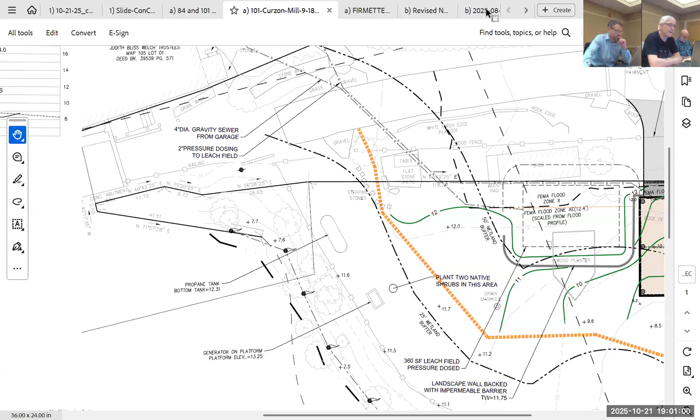All right, let's bring this meeting to order. This is the October 21st, 2025 Newburyport Conservation Commission meeting taking place in the Senior Community Center boardroom as well as online on the Zoom platform. This meeting's being recorded. The first item are certificates of compliance, etc., which we do not have any tonight. So we'll move on to public hearings. And let's open up the public hearing for Judith Welch, 84 and 101 Curzon Mill Road. Notice of intent. Good evening, Tom Hughes with Hughes Environmental Consulting.

As the commission, I think, is aware, we amended the filing to also include 84 Curzon Mill, ran a new ad in the paper, and we've notified abutters. The abutters list now includes, I think, 2 or 3 properties that are over the line in West Newbury, so we had to notify folks in West Newbury as well. But regardless, basically the reason is when we had our last full hearing on this matter, we had fielded the question about where you're connecting into utilities, which is a pretty damn good question.

And so when we went to answer that, it turns out that the existing septic for the mill where the Welches live is less than ideal, right? I mean, I think it would have been legal to connect to it, but it wasn't our recommendation. So rather than having a septic that is right up near the river, that is a very old technology, we opted to eliminate that, put the septic over on the 101 lot where it can be further from the resource areas. A modern design, improved water quality.

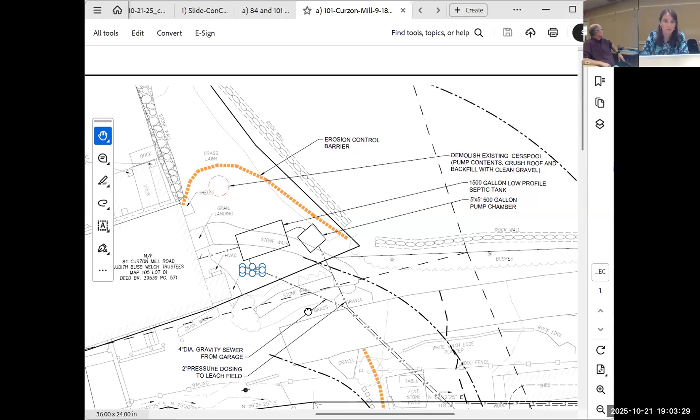No, sorry, Kelsey. Okay, so right there, what you can see is we're going to demolish the existing cesspool, pump the contents, crush the roof, backfill with clean gravel, and you can see where that's located. And you can see, don't have a scale bar up, but you can see how close that is to the building and to the dock. Not a great location to have a cesspool. It isn't failing, but it's just not what we really want to hook a new bathroom into.

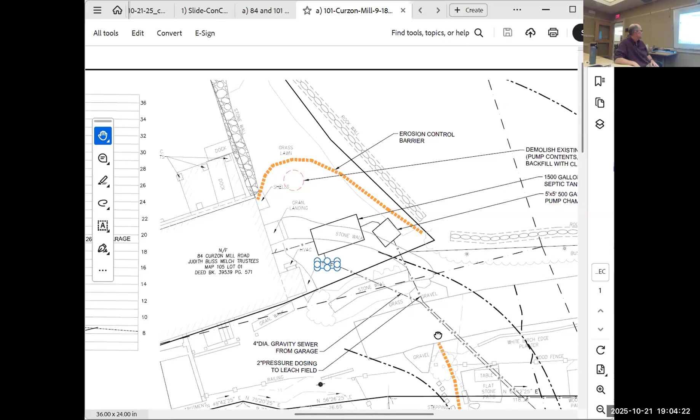So that'll be abandoned. We will be putting a septic tank and a pump chamber on the 84 property. And that will then connect over to the garage and where the septic system will be. So if we can scroll down to the garage end, so it's sort of bottom. Okay, a little bit to the right now. Yeah, okay, so we've got the proposed garage.

You may recall we're in BLSF, so this thing is gonna be pile or pier supported, basically an open structure. This is not Plum Island, so we can have footings, but it's gonna be columns. The plan right now is piles. We've done all the flood calcs to make sure at every incremental elevation foot within BLSF, we are compensating more than the fill amount from the structure. And then you can see where the septic system will be going off to the left.

The flood calcs have all been updated and we still meet all those requirements. The updated table is on that plan, probably in the bottom left.

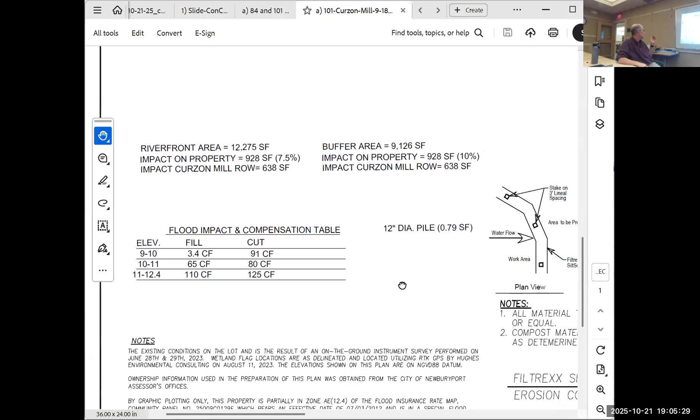So you can see, between elevation 9 and 10, we're cutting 91 cubic feet, we're filling 3.4. It's the nature of the lower elevation: in order to compensate at the higher elevations, we have to dig a bigger area, which means we're creating way more flood storage at the lower, just in order to be able to get the upper, because we have to kind of finagle our way into that area to the cut.

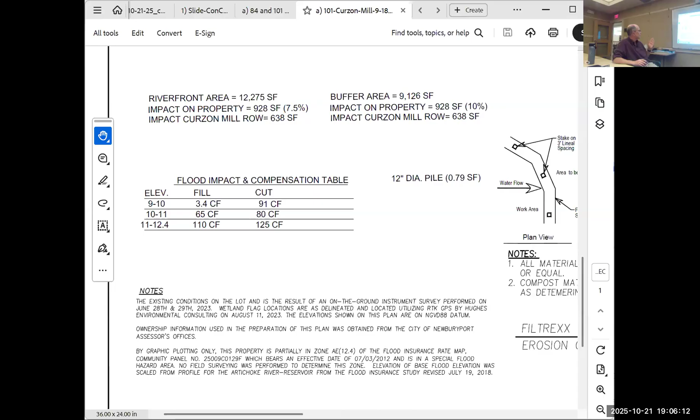10 to 11, with 65 cubic feet of fill, 80 cubic feet of cut, and then 110 cubic feet of fill at the higher elevations, and 125 is being created. The other issue that we had talked about, if we can scroll kind of up and to the right near the water, there's a propane tank and a generator.

So you may recall that there had been an issue that we had not been made aware of, but apparently there was a big storm, there was power failure, nothing was working, including the septic and all that kind of stuff. Everything was kind of failing, and the city allowed them to do some emergency work, but conservation wasn't involved, to put in a generator and a propane tank. So the question was, are those things in the flood?

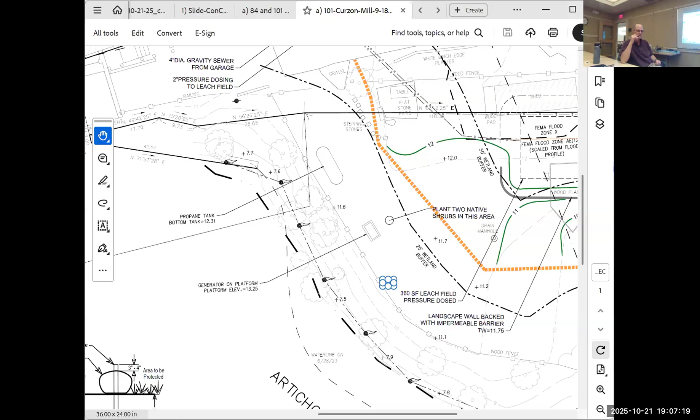The generator is on a platform, and the bottom of the platform is just above the flood at 13.25. The propane tank is on a stand, and the bottom of the tank is 0.2 of a foot into the flood. It's such a small amount that it's not gonna make the tank buoyant in the event of a flood. Depends on how empty it is, maybe. I mean, even if it's totally empty, if it's just 0.2 of a foot, it's not enough, I think. Sorry, this is based on the existing flood maps, meaning trends up until now.

Right, now the thing is, if the commission would like that elevated further, then we would just ask that you do a condition that asks that that be done, and then we can have the propane company do it. I can't imagine it's that difficult. They probably have to shim the stand up just a little bit, and we could get it above flood, but it was really 0.2 of a foot, so it's pretty minimal. So those ended up not being an issue.

All other aspects of the plan stayed the same. We had some plantings, I think, that we had included early on in the whole discussion. All that has not changed. So I think we really have just been waiting for the septic design to be done. That's being filed with the Board of Health.

And part of the problem was the turnover in the health department coincided with the contractor who had been witnessing the test pits for the perk tests for the city no longer being on board as well. So we kind of had to wait for the new health director. The new health person actually, I guess, can witness these things too. So we have taken care of that. Got a good perk and got a design, and Steve Sawyer, the engineer, did the design. Frankly, if I needed to get a septic system, he'd be the guy to call. So I feel pretty good about the project overall.

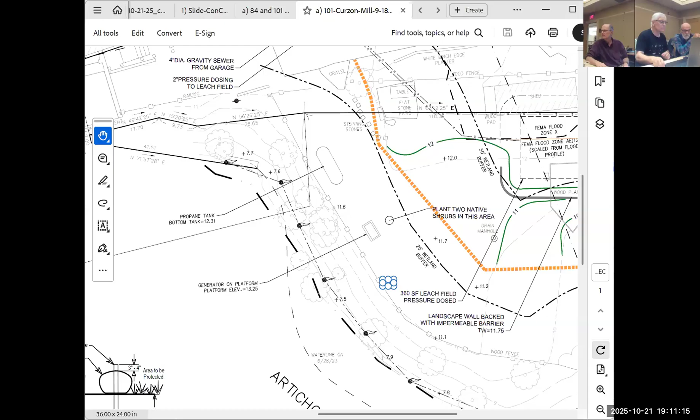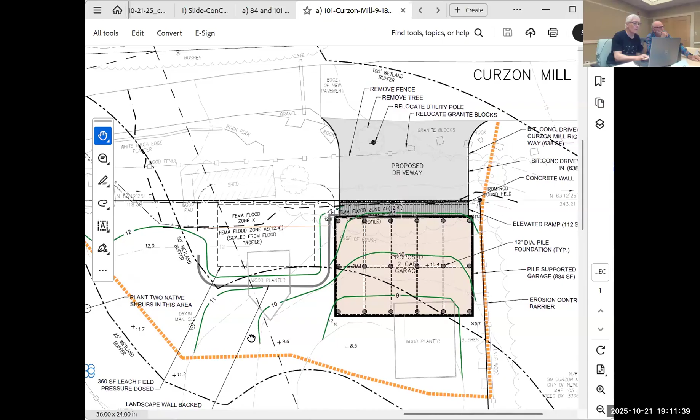I had a question about, there were two pipes that were laid in. Triangle. Here's some. One was labeled coming from the garage. Oh, so in the plan view. Yeah, all right, so let's go over there. The pipes, the labels were up by the house. That's the plan that I looked at. Keep going slowly more to the left. Oh, so you have to have a return for this.

I think this is a Presby system. So you have pressure dosing to the leach field, and gravity sewer from the garage, so you're basically sending the sewage back to the garage to go into the tank by gravity, then into the pump station that then pressure doses the septic. Okay, you're in the garage and you flush the toilet. Right. It's going over towards the house across the street. Why not directly into the leaching field?

Because it has to go into the tank where you settle out your solids, then into the pump chamber that takes the liquids and pressurizes it, so it goes into the pressure dose field of the septic system. So we could do it, but we would need another tank and another pump, and it complicates the design. This way you have one feed for your septic that's going into the field. That just didn't make any sense. I mean, it does now, but when I saw that, I said, what? Circle of life, sort of, yeah.

And the dosing is what? So pressure dosing is essentially a fancy way of saying it uses pressurized piping with like sprinkler heads to dose the field uniformly. Oh, you're just spraying the effluent all over the field. Yeah. And it allows you to have a smaller footprint and a more efficient system. The way it works, you're going to have a 1,500 gallon tank that has, where is the outlet that goes into the pump tank? At what level?

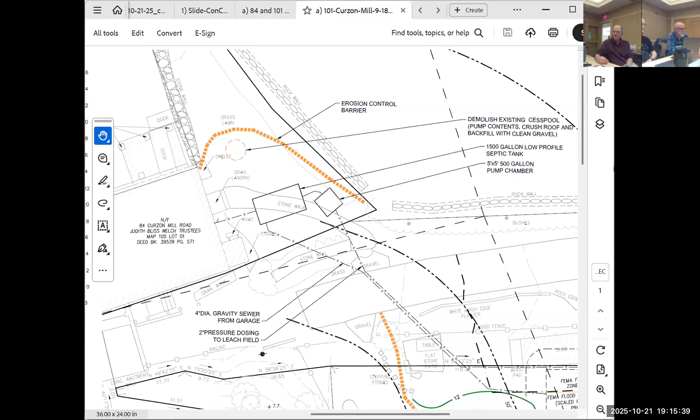And there's a cross-country sewer line that runs into that neighborhood from the pump station on Hale Street. It's not very far, but if you go in the middle of the wetland, there's a little island, and in the middle of the island is a manhole. So there are cross-country sewers, and I just thought there must be one. Well, the state park headquarters doesn't have sewer. They're on septic. And when you had asked about it, the first thing I was thinking, well, they wouldn't show a bathroom if we didn't have sewer.

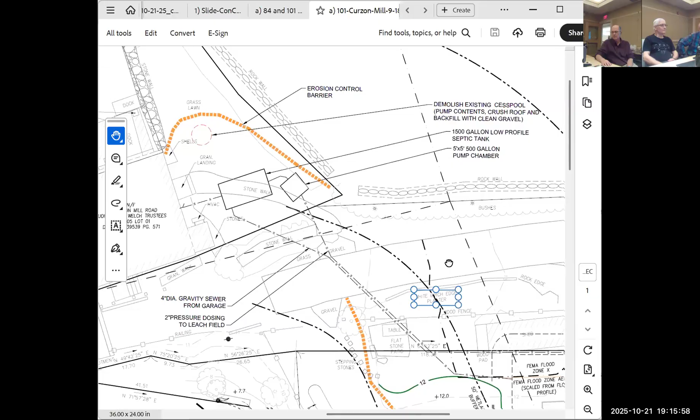Anyway, after that, I went out and looked around and on the house side of the property, I said, there's no room for septic. Yeah, no, it's a cesspool. I mean, this is an old mill building, right? I'm sure at one point, probably not too long ago, probably 67 years ago, they probably had a straight pipe. So that's sort of what I was looking for.

Yeah. No, I mean, at least it wasn't a straight pipe anymore, but still, there's not an awful lot of filtering and attenuation that occurs when you're that close to the water, so I'm thrilled to see this project results in not just a garage for the client that meets their need, but actually a new septic system.

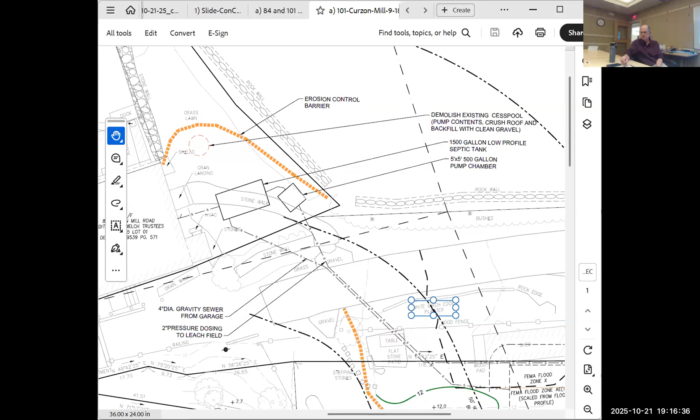And it's in the cover email that I did upload into the system, but basically within the regulations, septic upgrades such as this, where you're taking an old septic and improving it to make it compliant with Title V, is presumed to meet the regulations, all within the Wetlands Protection Act regs. The only thing that's not presumed to meet the interest are the BMPs during construction. So, Julie, I see your hand raised.

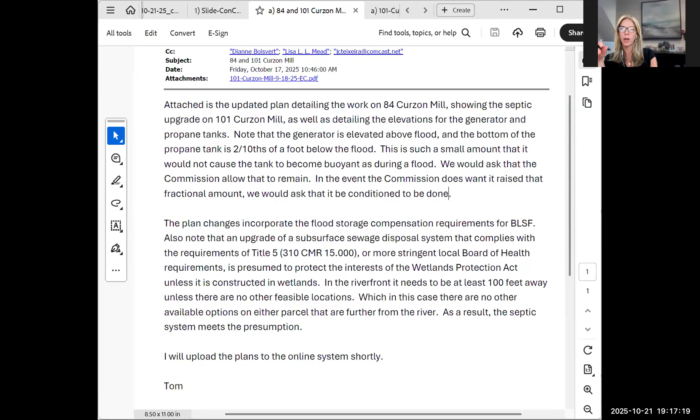Hi, yeah, thanks, Kelsey. So Tom, I just have one question about the cut and fill and the compensatory flood storage. Could you point out specifically the areas where that compensatory flood storage will be taking place, and then how that is being treated, vegetated, stabilized, whatever, during and after construction?

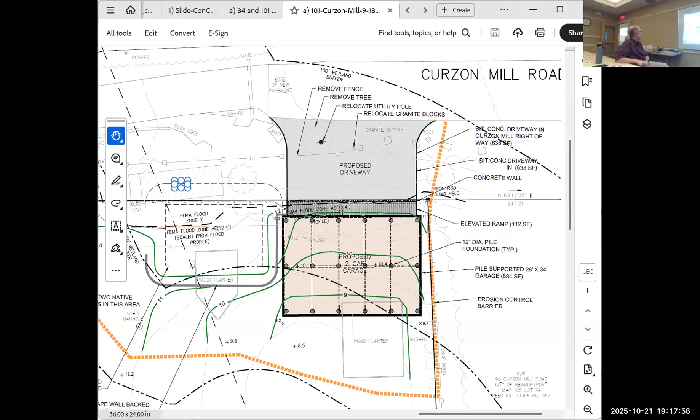Yeah, the bulk of it's under the garage, so there's a little bit of fill with the septic itself. You can see there's kind of a grade line that runs around that. You see elevation 9, 10, and 11, and actually the grading around the septic looks like maybe a combination of fill and cut. But the green lines there are the grading.

What we're doing is we're bringing elevation 9 further in, elevation 10 further in, and then elevation 11 further in, and then elevating the structure up on piles. Underneath, I believe it's gravel or it may even be concrete, but it's going to be under a garage. And then any of the areas that are graded within what's currently lawn would just be restored back to lawn. Got it.

Okay, maybe that could be marked on the plan in terms of where you're going to revegetate. Or maybe it's in the narrative already that any areas disturbed for the compensatory flood storage or through construction will be revegetated. I don't know if it's in there.

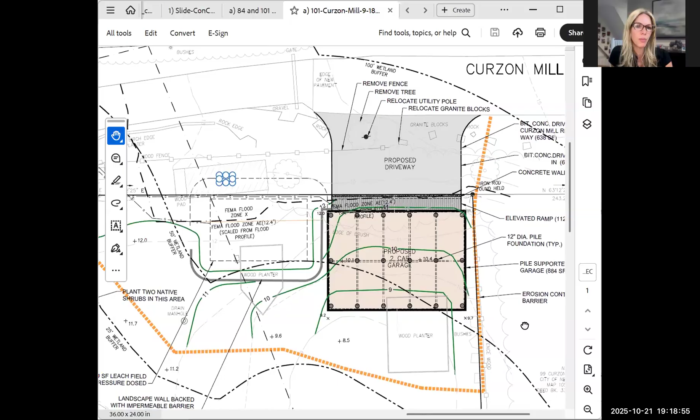Yeah, just to make sure, we'd be happy to accept a condition that all areas that are disturbed outside the footprint of the garage would be revegetated. Okay, got it, that makes sense. I think that's a good special condition. And then you mentioned 2 shrubs and 1 tree.

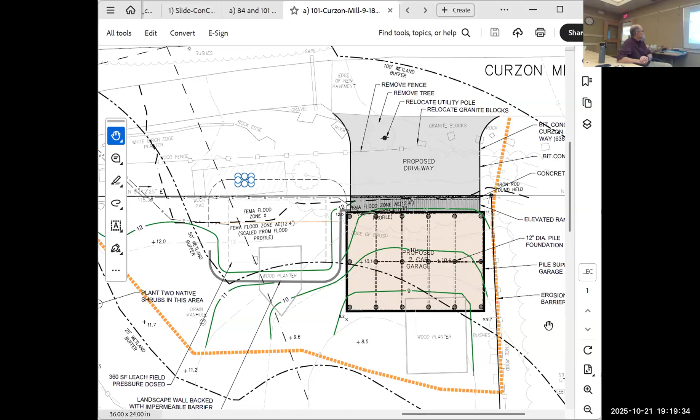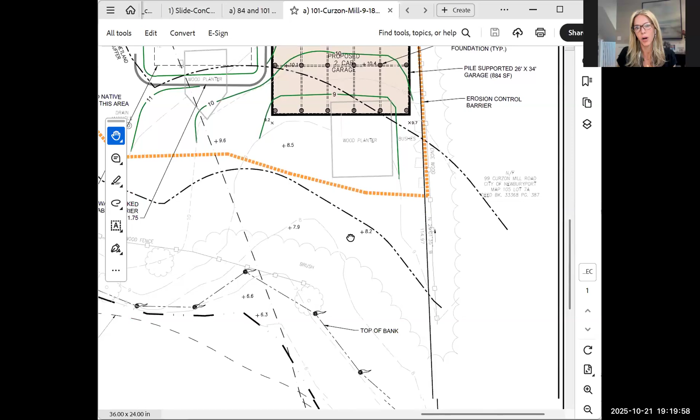I remember a long time ago we had talked about plantings, and there was 1 tree that was going to be planted, but could you remind us where that was and what tree it was supposed to be? I'm stretching my memory, but there's 2 native shrubs down near the generator right there. And the tree, I think if we look down to the right a bit, I thought we were putting it in there. I did too, but let's mark it on the plan and identify the species too.

I don't know if Steve had any preference; I think this was a discussion Steve was having with you guys. Yeah, since I'm not seeing it, it may have been when we made that offer that they still wanted to figure out where to put a tree. Could we condition that prior to planting the replacement tree, we'll show its location for review and approval by the conservation agent? Prior to what? Prior to being installed.

I would rather have it be prior to issuance of the order, because it should be pretty easy to identify the location, pick a tree and send it over to Kelsey. Yeah, I thought we had something on here, but I knew everything like the back of my hand when we first filed, and it's been a while, so long getting the septic stuff done. So if you wanted to hold issuance until we get you an updated plan showing tree location, we can do that.

As long as it's some appropriate native. Yeah, I mean, anything like... So trees that would do well there: Amelanchier on the smaller end. Amelanchier, it's also called shadbush. It grows at the biggest to a 25 to 35 foot. It's a flowering tree that you can get multi-stem and almost looks like a shrub, or you can get it single stem.

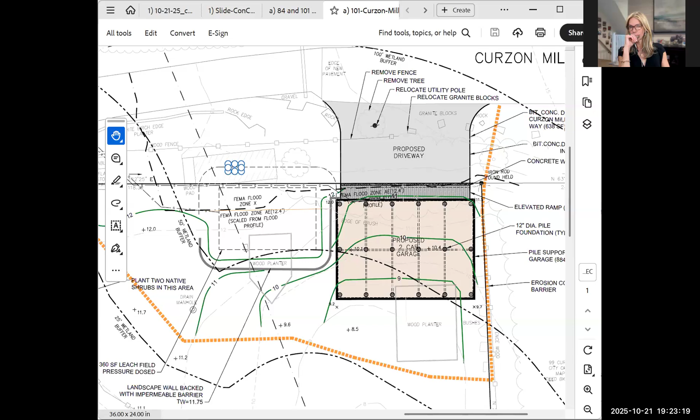Black cherry is another thing that would do really well, but it's not really what people love to plant. What is the tree that's being removed in the proposed driveway? I wanna say it's an oak, but it may be a maple. If we get back to the photographs, I think it may be in the photographs. Something as comparable to that as possible, just habitat wise, to keep things consistent would be good. So if that's an oak, maybe we use the red oak, or red maple rather than the shadbush.

Yeah, I would point out that there's an awful lot of wooded area on that lot down along the water. Did you have photos on OpenGov? Yeah, this should be, narratives, let's see. Keep going. Site plan, no. John Heritage, no. No, narrative, no. Another supporting, it's not that. No, it's just the narrative. It wouldn't be in the narrative. Okay. You can keep going down. There's a lot of attachments here, I think.

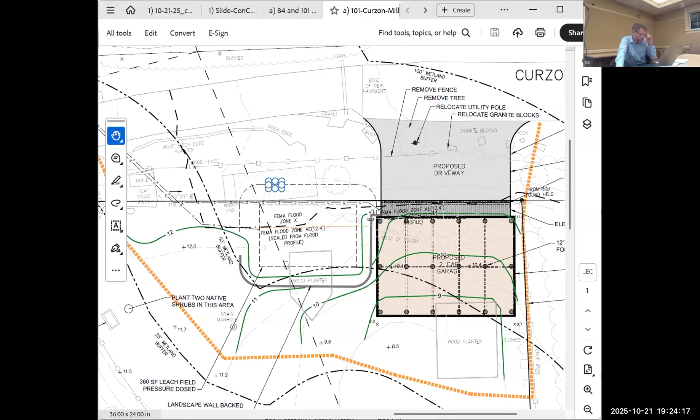Is there a second page? I don't see any photos. Yeah, I don't recall seeing photos for this one. Really? Are you sure you uploaded photos? I know they were in a presentation file I had emailed in, but that may not have gotten uploaded. That might be part of it, and that's why I recommend uploading everything to the OpenGov hub. Yeah.

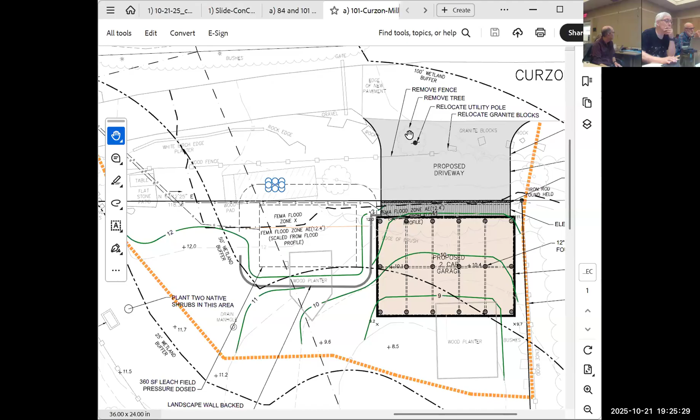If you guys want me to take a second, I can open up my laptop and pull it up, but it's a deciduous tree, pretty good size, from what I remember, and it's right up near the street. Well, there's two, there's a big one, and then the one right next to the telephone pole. Is it the one next to the telephone pole? Yeah, the one next to the telephone pole is in the footprint of the apron. Okay. And then there's a much larger tree uphill a little bit. Right, and that one is not being shown, so the trees on either side are not currently coming out.

If you look, Julia, hopefully you can follow, to the left of the proposed driveway. Right here, yeah, I think that's the one you're thinking of. That was pretty good size. I don't think that's coming out, but it is close to the septic, so there may be some impact in terms of the root system, and I think what we could say is if the additional tree has to be removed for the septic, we would also plant a second tree, if you wanted to condition that. But we'll show you the location at least for the first tree.

I have this up, the street view. Yeah, it looks like an oak. Do you know which one it is? Scroll over. Oh, you should turn around facing the other way. We're looking back towards the mill. Can you look towards the mill? Yep. Oops.

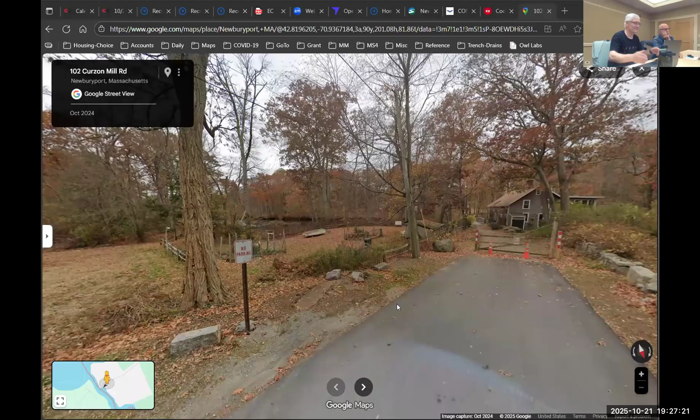Yeah, see the one right next to the telephone pole? Yeah, so that on the plan, if we can go. Flip tabs back to the plan. I believe that's what has to. So the pole and the tree, the pole has to be relocated. We can't tell you where that's gonna go because that'll be entirely up to Grid. But the tree goes, that's the tree that definitely goes.

And then the tree that may potentially go, if we go back to street view, and you see the fence, right? And it's kind of hiding on the other side of the telephone pole. But there's a tree kind of right next to the shed right there. And that's a potential removal, just kind of right above. This one here? No, you can actually, it's this one. Oh, this one, I think. Can't get quite close enough. Yeah. To do a side view.

Zoom out a little bit, I think there's another tree. Sorry, you're looking for the street view again. The uphill side here. Yeah, and I don't think that if you look at the work area, that's not. You're talking about this one? Oh, which? It's not in the picture. Oh, right now, okay. Yeah, if you rotate, you'll see it. Yeah, right there. I think that's near off property; if it's not off property, that's not gonna be impacted. Okay. Yeah, I think the only risk of the other one that would be impacted is that one over by the shed. Just because it is fairly close to the septic.

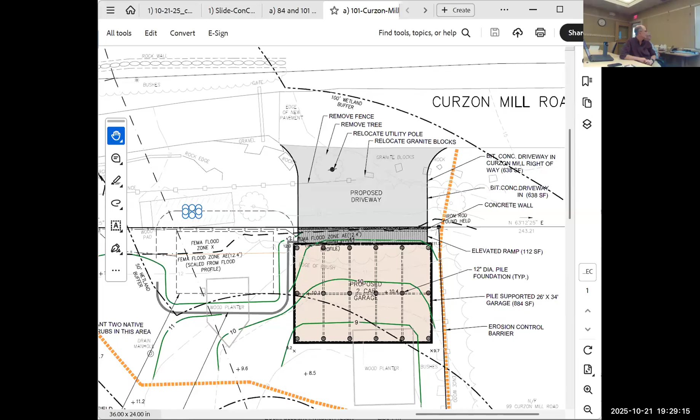Is that shed going, city? Shed's going, yeah, the septic has to go in there, so the shed, I think, is shown as going out. So now if we go back to the site plan and take a look at the green grading area and kind of where the limit of work is, you can see the outer limit of the septic goes pretty close to that tree, which is why I'm a little nervous about it. The one by the shed, but the footprint also goes right up to the shed, so I believe the shed is gonna go. Is there any chance that the septic could go under the garage, get further away from,

so the problem with that is we can't, because we're dropping the grades. And we need the separation to groundwater. So we have to have that as high up, but we also need to compensate for flood storage. So it really is the better place for it. You probably want access to it too. Yeah, I don't think it's allowed under a structure. Right? I'm not sure if there are provisions that would allow it if it was an open structure, but it's not ideal. It's certainly better than a cesspool, but. That's a low bar.

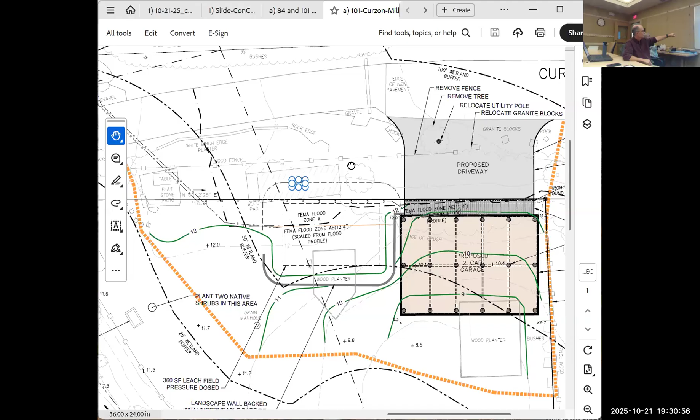Yeah, and the other thing to keep in mind is the garage, look at your buffer line. Bringing it under the garage doesn't really make it any closer or any further away, because the river just upstream of the dam is pond-like, so you've got buffer coming in from the bottom of your screen and from the left of your screen. And if you look at that buffer line, it may actually be further away where it's located than if we tucked it under the garage. It'd certainly be close. I mean, the only place it would be better is the city land, which is right to the right of that. Environmentally, yeah. How many years do you wanna wait?

Yeah, so I think we've got a good project. These guys get a garage. If you walk down there, you know they've got a really tight living space, and this gives them something they've sought after for a long time, which is some decent storage and a place to park the car in bad weather. And a home office in an old mill building where they really don't have a lot of extra space. And then on top of it, we get a new septic system. Okay. Do we have anything else?

And what I'll offer is we'll mark a plan up with 2 proposed tree locations. One that will definitely go in, and one that will go in conditional if the other one has to be removed. And then if you guys voted to just hold issuance till we get that plan to you, that would be a way to deal with that. That's perfect. I think that makes it a lot easier. Thank you. Okay.

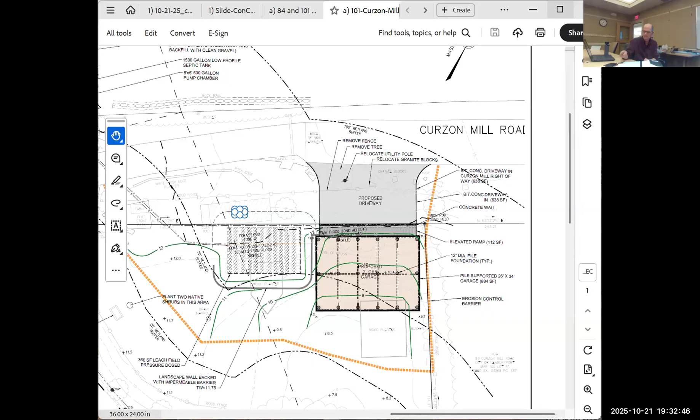Okay, do we have any comments from the public? Any hands up? Yeah. What would you like to do? Motion to issue an order of conditions for 101 and 84 Curzon Mill Road with the special conditions as discussed related to tree planting and revegetation of disturbed areas.

Second. Okay, roll call. Barb Riley, yes. Julie Goffredson, yes. Steve Moore, yes. Janet Daisley, yes. And I vote yes. Okay. On to.

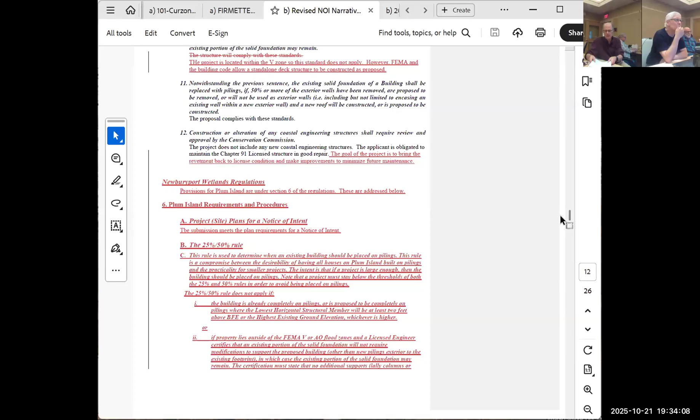All right, next item is Cindy L. Singer Irrevocable Trust, 5 Basin Street. Yes, so I have this one, if we can put up the site plan, thank you. Okay, so, to remind the commission, this project has several different components.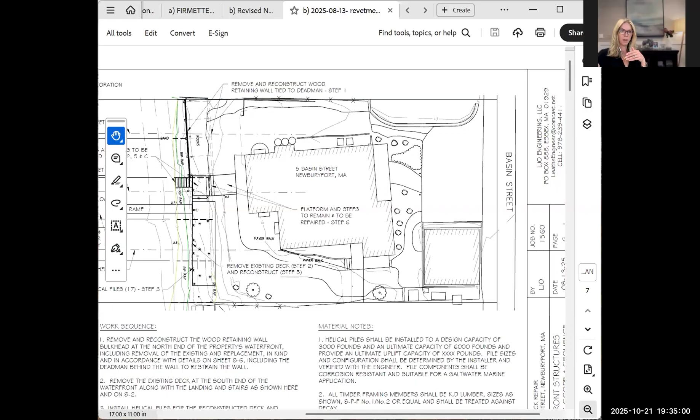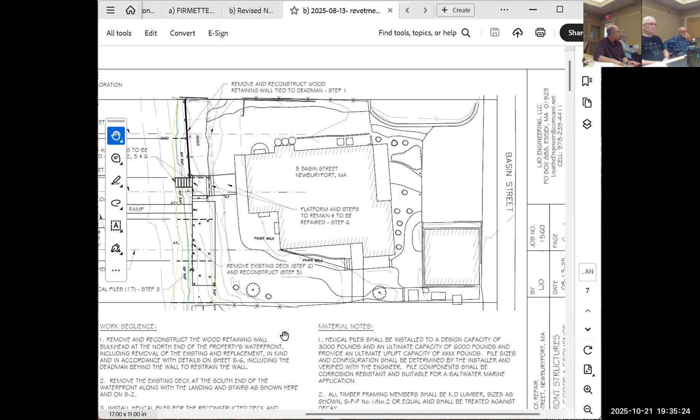An outdoor kitchen is something that we can't really build as a new structure with floodplain issues without creating a problem, but within the structure, we can do it, and it's kind of a creative way to use that garage. The other part of the project is there's a proposed deck, which is going to go onto the house, and I feel like there's a better plan view of this. Can we go to the next sheet? Maybe the next one.

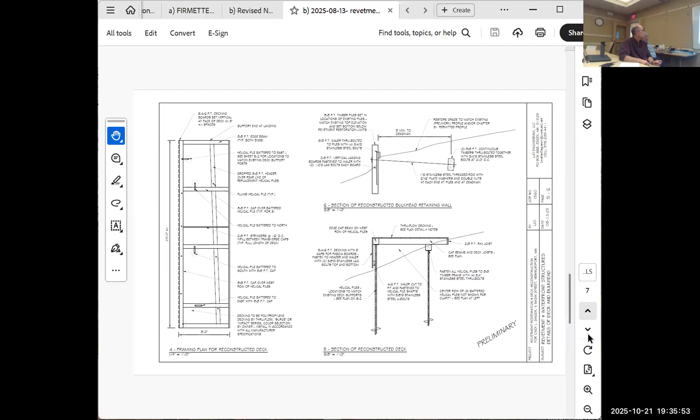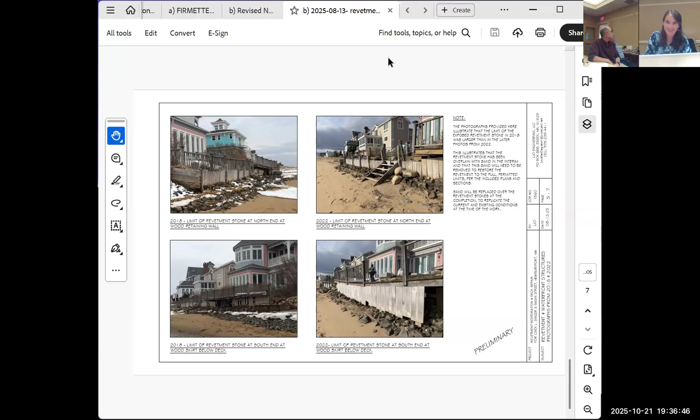Oh, this is the structural stuff. Can we go to the site plan, there's another site plan set. That's why I was confused. We're looking at the structural plans. Right there, that should be it. Okay, so that's much better. All right, we'll just have to update the share screen so folks can see. Yeah, I'm just trying to get it into Adobe so I can use all the tools. The nice thing about Adobe is you can just switch tabs. Right. Stand by. All right, can folks see this plan?

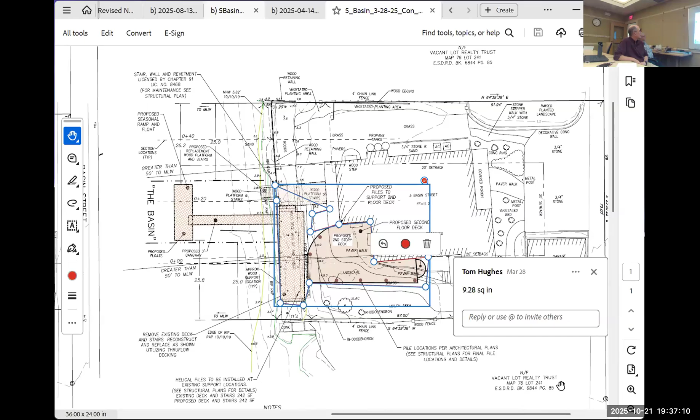Yes. Okay, so that's the existing condition plan. If we go to the next sheet, there's a proposed deck, which is all upper story. That's all pile supported, and then there's a spiral stair that comes down. It's going to be significantly elevated above the ground, and those of you who attended the site visit saw how high up that part of the house is.

So it'll be a pile supported deck. It meets the requirements, it's attached to the building, it meets all the elevation requirements for a building, and it's elevated up above that. The other part of the project: there's a proposed seasonal dock, which we can talk about in a second. But there's a Chapter 91 coastal engineering structure that runs along the shore.

It's a licensed structure that consists of a revetment on the southern end, there is a bulkhead shown on the license plan, I believe, and then there's also a bulkhead shown on the northern side. Currently what you have is a riprap condition that has slumped since the license was issued. Those of you at the site visit saw how it's flattened out a little bit, and it's a little bit concave in the middle. And the stone is undersized.

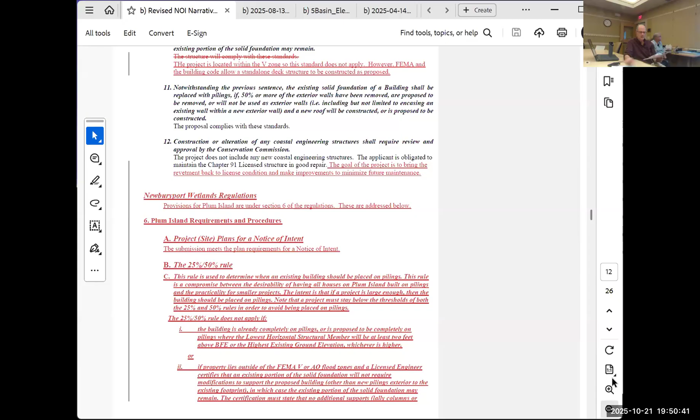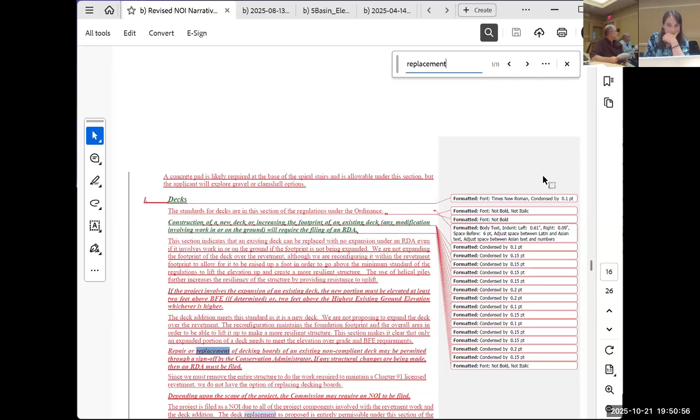So when you look at the requirements for a replacement deck, which is in section I of the regs, I think it's section 6I, if you want to look at the red line. Yeah, I'll go to the page that's got the most red line. Okay. I don't have page numbers on my red line version. Replacement deck. Keep going down, keep going. Okay, right here. So when you look at this section.

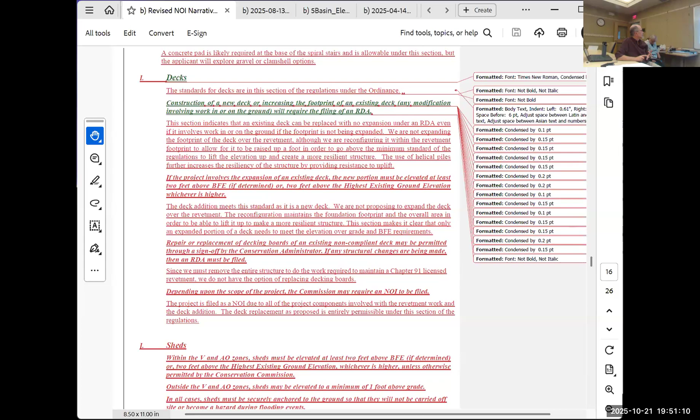So basically it says, construction of a new deck or increasing the footprint of an existing deck, any modification, including work in or on the ground, will require the filing of an RDA, right? But we're doing more than that. So you go down and it says, if it involves expansion of an existing deck, the new portion must be elevated at least 2 feet above BFE or 2 feet above the higher. And then it says repair or replacement of decking boards, and that's the sort of minor part.

But what this is saying is that whatever we're doing, and this does apply to replacing a deck, if it's only an expanded portion of it that would have to be elevated, I think this language allows the commission to approve this. And since we do have to rip it out in order to repair the revetment, while I believe this would allow us to put it right back where it is, I think it's in the environmental interest to do a slight reconfiguration so we can elevate it slightly and add the through flow decking and make it at least more resilient than the current condition.

And then add to that it's within an area that is revetment, as opposed to sitting out in the middle of a sand area. I mean, I think it's an interpretation. I gotta interrupt. I completely disagree with your argument about what our deck regulation says. You've determined your interpretation of it. I can see that, but I don't read it that way at all. So I guess we just have to agree to disagree on what that section means.

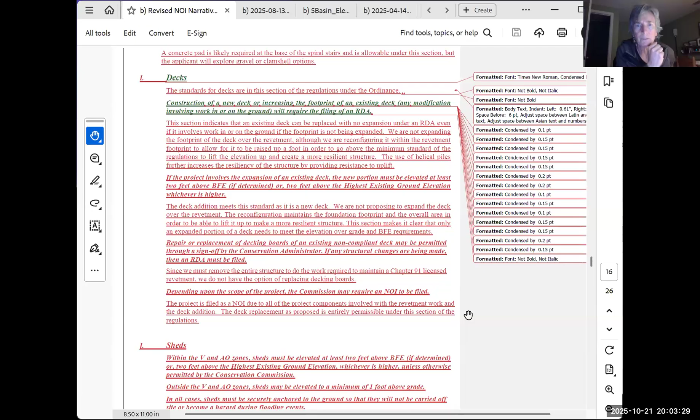And I think also the wording says that you need to remove it to replace the stone and then rebuild, but you really don't need to rebuild in order to fix the revetment under the Chapter 91 license. You don't need to put the new deck on. You just do need to remove it though. It does need to be removed, but I think the homeowner would be in a real tough spot. I don't think she would want to repair the revetment if it meant she couldn't put the structure back, and she would probably just fix the structure in place and live with a failing seawall until somebody makes her repair it.

But the ideal is, if you remember the site, and it was this way when she bought it, you go out the doors of the house and there's not much land, and then you've got that structure which gives you some utility, and so it really means removal of a big chunk of her active area for enjoying the outdoors on the water side of the home. So it would put her in a spot.

And I think it's a reasonable thing, if you think of it from her point of view, living at that location, buying the home with that structure there. That structure was permitted by the commission at the same time that the Chapter 91 stuff was done. And I think it's a reasonable expectation and hope to be able to rebuild it in some fashion there. I think it's more the way it's written. It says it needs to be removed and rebuilt. It needs to be removed, but it doesn't need to be rebuilt. Like you said, that's something that the homeowner is requesting.

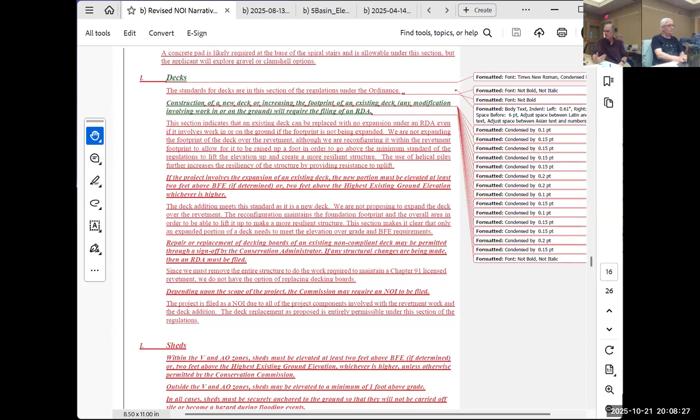Yeah. I'm not sure I fully buy that modeling. I think the velocity zone mapping on Plum Island is a little bit weird. Why we have a velocity zone with no AO zone behind it on the ocean side in some spots doesn't make a lot of sense, but regardless. Most of the erosion that I see in the basin comes from currents and swirling, not really that. But when wave action hits, some of these areas are just not able to cope with it.

Because the velocity zone in some parts of the basin is actually mapped coming from the ocean over in Newbury, but here it is mapped coming across the Merrimack. And I think it's been some of those storms that have had some wave action and some current that have knocked things around and caused us to settle. Julie, you have your hand raised?

Yeah, I just wanted to say that I don't believe those vertical panels were ever part of any permitting process, and they certainly wouldn't have been allowed. So I think they were probably placed by the homeowner after the fact, like Tom's saying, to prevent kayaks from going underneath the deck, or whatever erosion or water lifting up the deck panels. But they should not be there, and they should not be allowed to be left there.

Yeah, I have pictures going back from before she purchased the property and they were there at the time, and I can look and see if we go all the way back to when the prior owner permitted that, but I believe they actually were on there from when it was originally built. You think it was part of the permitting, like the design? I don't know that the permit plans were that detailed.

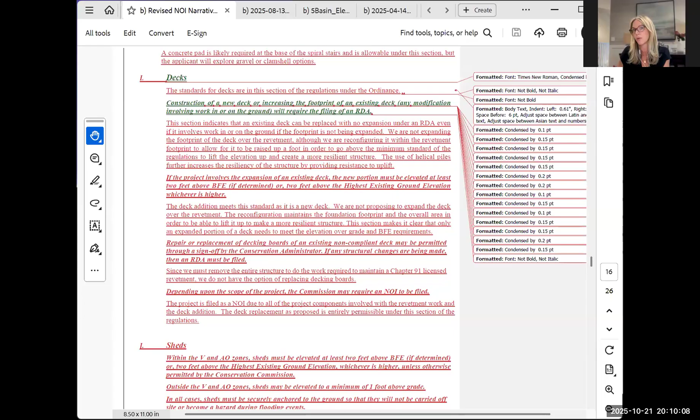Yeah. Regardless, if the revetment is being renovated and rebuilt, those need to come out and they need to stay out. That's not something that CZM or DEP would ever allow right now, whether or not they allowed it in the past. We'll take a look at that. I'll look at that further with Lisa O'Donnell and, again, we'll take a look at that. Okay.

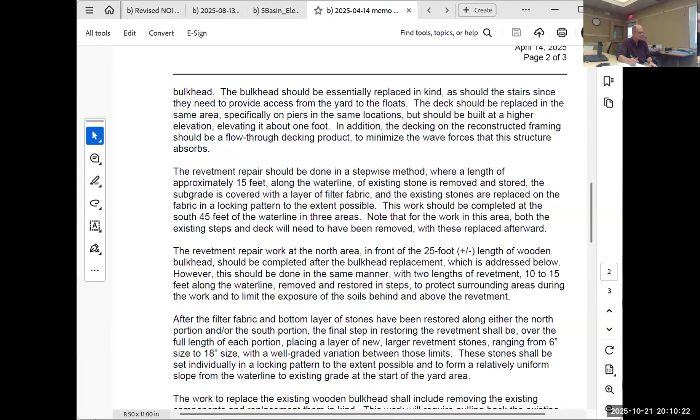Couple of minor things. In the narrative, you talk about mitigation areas, but there's nothing on the plan. Page 5 on the Wetlands Protection Act. Let me look.

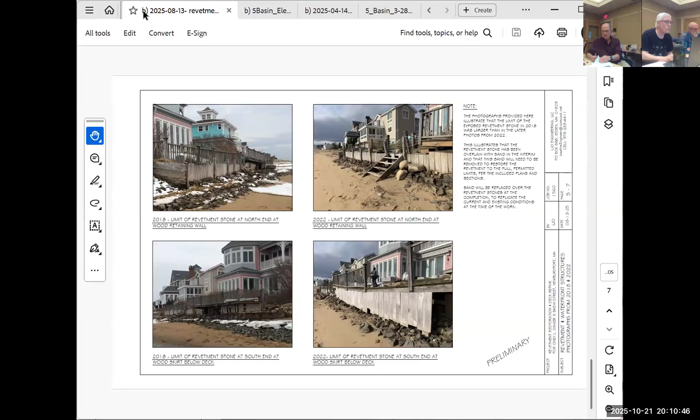I don't do it as much as Bill used to do, but I do occasionally cut and paste. Oh, I know, I could tell. Yeah. The older I get, the more.

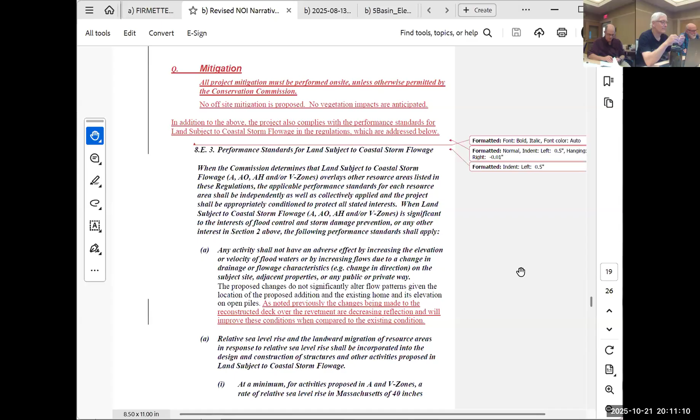I know they went through ZBA and I believe there was. I mean, it's a fairly obvious thing. I think just the assessed value of the building and not the land is like $800,000 or $900,000. I mean, I don't think we need an appraisal on this one. No, I'm not suggesting you— No, I know, but I thought when I wrote the original narrative, there was supposed to be an appraisal, but I'll figure that out.

Okay. Do we have anything else? Anybody? One other thing, there was a discussion of an access plan being submitted prior to construction, but shouldn't that be done long before, as part of this? So actually, we've talked. In getting ready for this, we've talked to different contractors, and depending on who's hired, they have different ways to get in. One would come in from the front and sort of drop equipment down onto matting carefully installed and come up to it from the landward side, which seems really awkward.

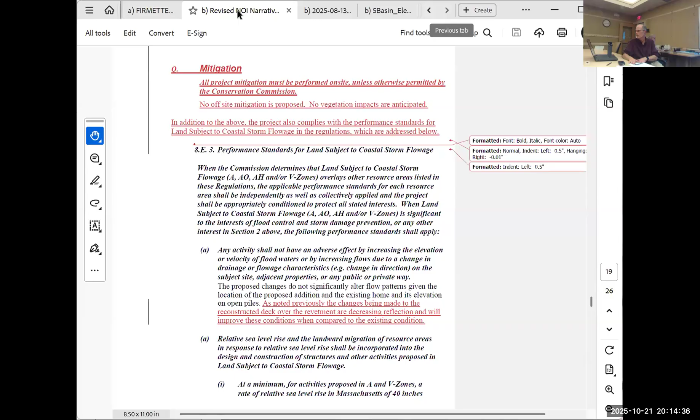So cranes are possible, but I think during the site visit, the owner did point out that there is a drivable way down onto the beach at the end of the street at the end of Basin. It didn't look to me like it was navigable. Yeah, and so what I was hoping is I can spell out the different options, but a final access plan would be submitted prior to work that will include however we're gonna protect whatever route in. Coming from the street is very difficult, given how to circumnavigate those tight sides on the house, and there's a lot of landscaping that I'm sure the homeowner doesn't want to lose, and once it's torn up, we don't get to replace it in kind.

And there's a possibility of even using a barge. Yes, Andy. I was just gonna suggest that rather than spending a whole lot of time in an extended hearing process, it's already been continued a number of times, perhaps coming back with a plan and some simple detailed information to clarify the range of options that might be needed, so that the commission at the time of approval can incorporate the access route and how that's gonna be done. So there isn't a follow-up need for review by the commission or the agent. It'd be simpler, in my view, if you include that in whatever comes back to the commission, so the order of conditions can include that.

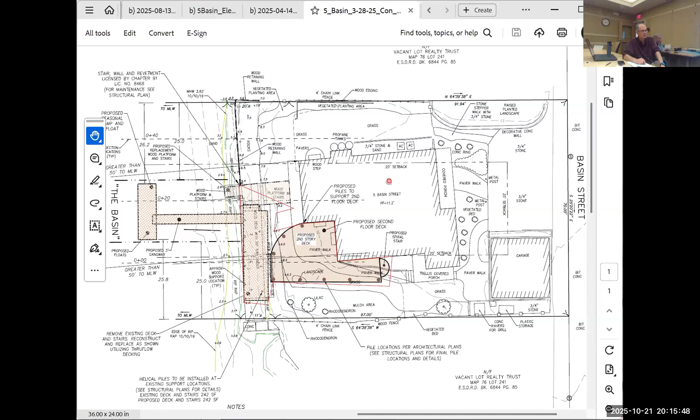Yeah, I think we'll do that, and we'll include probably the most likely, I've got to look again at using that access down, what that would involve, and that we would commit to doing some level of monitoring for that. And then the other potential options are by barge or overland, which would involve something like what I described in the NOI, with significant planning and protection. And we could always come back if it's something different than one of those.

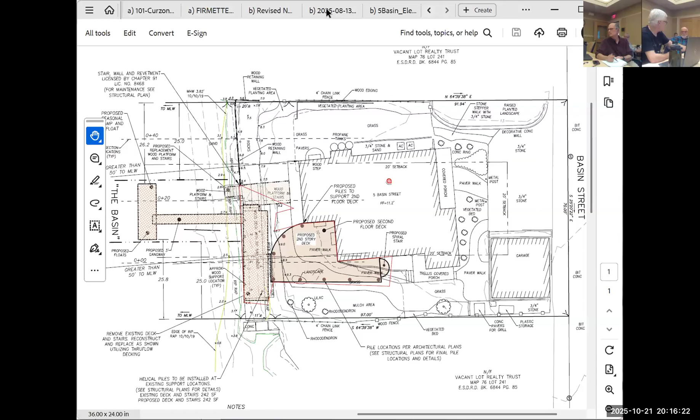Okay. All right, do we have anything else for now? Anything from the public? I don't see any digital raised hands, so you're looking for a continuance. Yep. Take a motion for continuance to, what's the day I'm not gonna be here? 19th? Second. All right, roll call, Julie Gottfredson.

I can't hear you, Julie. I'm sorry, I thought I said the wrong thing. Yes. Okay. Barb Riley? Yes. Anna Daisy? Yes. Steve Moore? Yes. Okay, thank you.

All right, the next item is William Pike, 10 I Street, which we have found out they don't have a complete application, so we're gonna table this until the next meeting. All righty, next item is enforcements violations. Do you have anything new on that?

That also, I think I'm gonna try to get more of an update for the next meeting, which will be me reaching out to Lisa and Lee's firm to see if they still represent the homeowners and seeing what their plan is. Most recently, they represented that they would be going through the NOI process to get an after the fact NOI, but we haven't heard anything from the firm since, I think, this summer. Another option would be that they've removed the structure. Andy and I did a drive by and it looked like they might have been getting ready to move this. It's like a trailer on wheels, so. Oh, you talking to S Street?